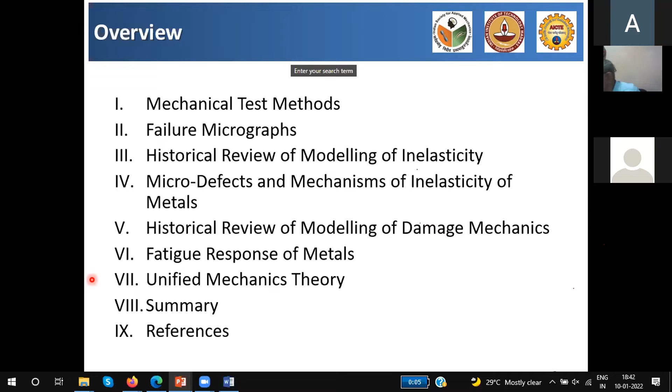These mechanical testing methods are very important, because the proof of the pudding is finally in the eating, and everything has to be calibrated and validated with reality. And that reality is with reference to what you see in tests.

And what are the tests that people do? People can try to pull things in tension or compression, or perhaps do some shear tests and so on, and get some graphs of various types under different conditions, under different loadings, loading rates, under cyclic loads and so on, and get some nice graphs, and perhaps try to capture those graphs using models.

So the entire business of modeling has to be validated only with experiments, and doing these experiments is not always easy. Therefore, it is good to know what experiments we can do, what experiments we cannot do, and how we can generate good experimental results even with limited test facilities that we may have in our own respective colleges. This is where I think a lot of collaboration is required, especially when you want to be close to reality.

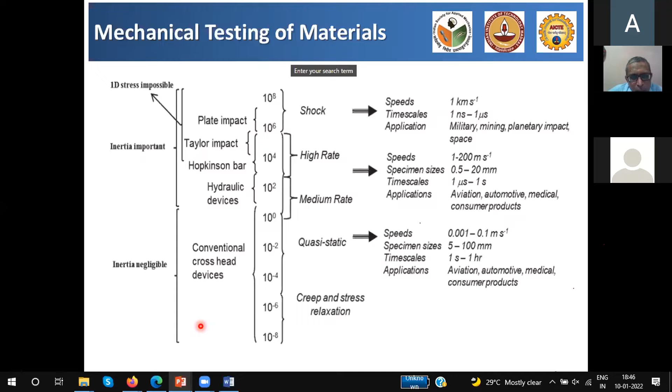In the recent time, there has been a lot of interest in rate dependent testing, or high strain rate dependent testing, and recently we also started doing some work on this high strain rate dependent response of materials. So we'll go into the type of tests that can be done to capture each one of them separately.

Now, what is it that is of interest to us is always a question. Do we really want to capture the entire load history? Yes, perhaps. And sometimes, are we interested in the modulus? Are we interested in the strength, ultimate strain? Is that enough? These are the questions that we need to keep asking ourselves each time that we do these tests.

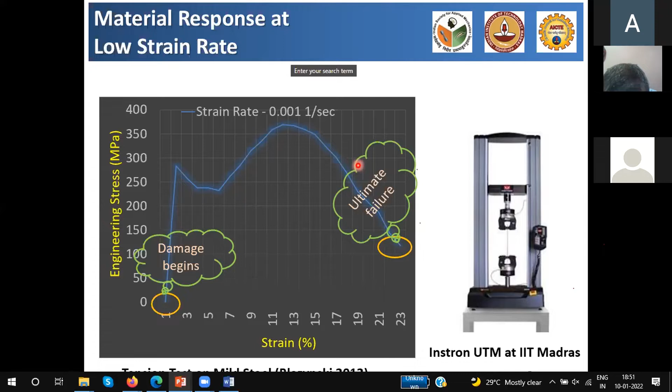So let us go into other types of tests that are possible and necessary whenever you are dealing with materials.

If you think your material is isotropic, you don't need to do any other tests beyond the one shown earlier. This is because an isotropic material has the same properties in all directions—not only elastic properties, but also failure properties—so you don't need to do tests in different directions.

This is very important to note, because all the models we develop during this course will be multidimensional in nature. They will talk of tensors and multi-axial states of loading. But just because you have a multi-axial state of loading, does that mean you require multi-axial testing? This distinction is not well understood by people, so it needs to be carefully understood.

In recent times, people have developed multi-axial testing apparatus, where you test a material both in tension and also in torsion. Professor Chellapandi, when he gives his lecture two days later, will talk about a special phenomenon that takes place especially when you are twisting your material in torsion in a cyclic fashion while keeping tension intact.

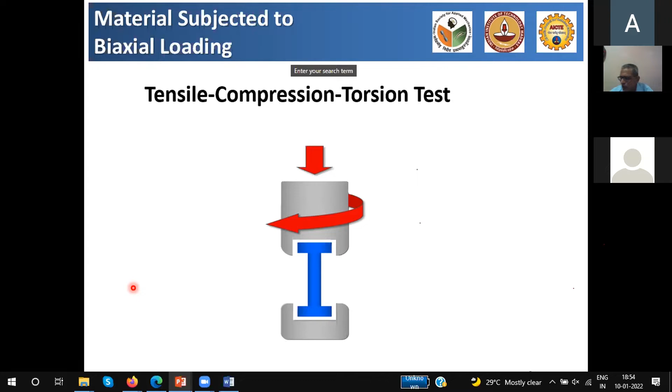Multi-axial tests have been developed in the recent past, of two different types. You can have tension or compression combined with torsion, dealing with a multi-axial state of loading, or you can have a biaxial testing apparatus, which involves testing in two in-plane axes.

At IIT Madras, we have apparatus that can do both: biaxial state of stress testing on thin polymers, as well as tension-torsion type tests on metals. I would say they are underutilized, and anyone interested in doing these tests is welcome to collaborate with us, or at least see how we can use these facilities more effectively.

But for most applications, you don't require these. Still, testing is important to know about. You require it whenever the material is anisotropic, because with an anisotropic material—both in elastic and plastic deformation—there is a need to do tests in different directions, or in combinations of two different directions.

That is an important thing to note, not only for metals, but also for other materials. Some special labs are working on these things, and it's not always required to do these tests. There's enough challenge even without this multi-axial testing that needs to be done.

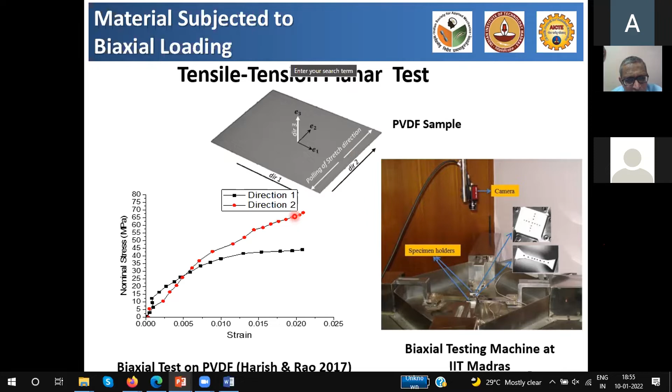Moving forward, there is also a need to do tests at high strain rates. In the recent past, especially over the past 10 to 15 years, there has been a great rush in trying to do these tests at high strain rates. About 10 years ago, building these facilities was prohibitively costly, so people working on high strain rates simply didn't do the test, or borrowed the material data available in a package like Adina, LS Dyna, or Abaqus, plugged in materials and values, and generated results.

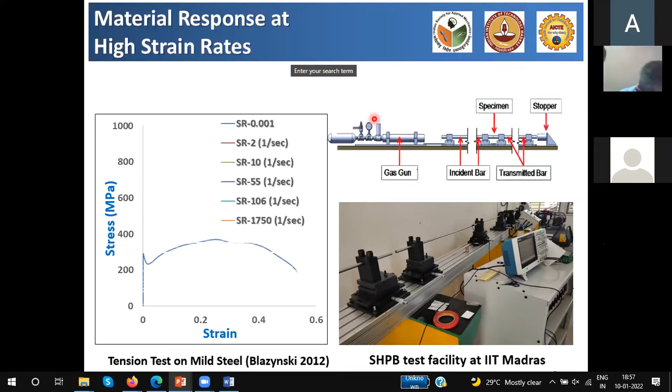Some of these results are shown in the next graph. These are important primarily because your yield stress can keep changing depending on the rate at which you load the specimen, as you can see in this figure. When you go from a quasi-static test to a very high strain rate test, on the order of 1750 per second, you find that the yield stress drastically changes, even though it falls off just as drastically after some time. The modulus more or less remains the same, even though the yield stress changes a lot. The only way to capture this is by doing an experiment, and this has been in the literature for quite some time, with people trying to capture this entire behavior through various models.

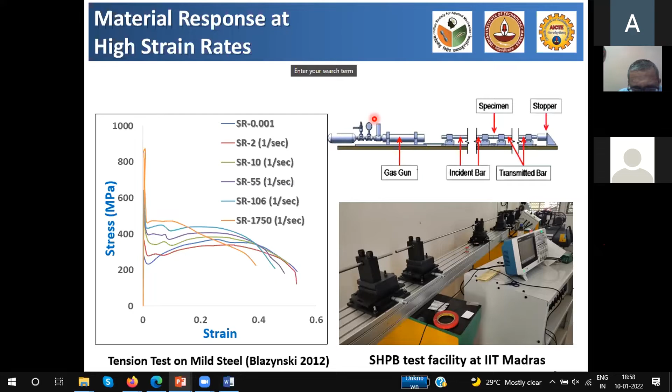Moving forward, you also have tests that need to be done for cyclic loading. In the olden times, people were simply monitoring the number of cycles to failure and developing something called a Wöhler curve, which served to find out how many cycles a material can withstand. When you have a combination of these cycles, people would combine what they defined as damage under various loadings and try to predict the life of a structure. Not all these predictions are astrological, but many of them are not really validated. If validated at all, it's over a limited range, yet they are still believed to be true even for the projections they are expected to make.

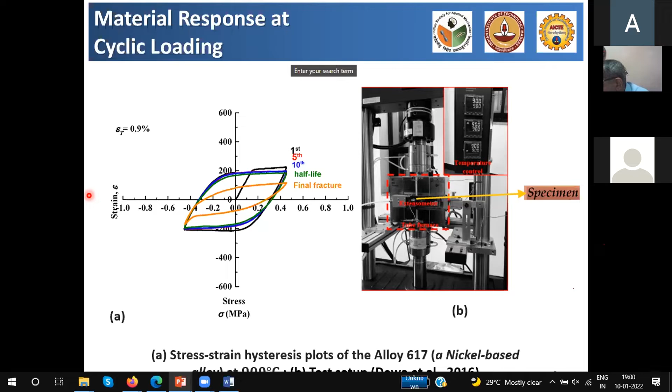Proceeding further, if you look at the stress-strain curves at different rates, some of you are working on high strain rates, you find there is a wide range of behavior that needs to be captured. If you take a material like copper, the initial modulus seems okay, but afterwards there is a lot of change in the nonlinear portion of the curve, which keeps changing with strain rates.

If you take a material like concrete, not only does the post-peak behavior change, but the initial modulus itself keeps changing, and you get different strengths depending upon the type of loading rate.

Similarly, when talking about a material like polyurea, the strains involved are quite large, of the order of 1.2, etc., and you find a wide range of post, quote-unquote, yield behavior in the polymer.

Terms like yield are actually relevant for metals, but they have been borrowed and used very loosely even for other materials. Therefore it's good to know what they really mean, what they originally meant, and what they should not be used for.

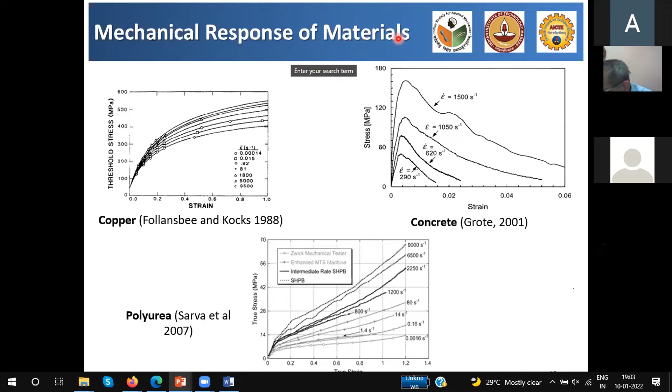Moving forward, now that we have looked into testing of these materials, in recent times merely testing a material is not accepted. People want to know what happens at the failure surface of the material, so people have been reporting failure micrographs.

This is something of an art that needs to be learned by all of us at different stages, depending upon the microscope with which you see different features of the same material.

Here you see two different zoom positions of a micrograph: one at 100 micron length, the other at 10 micron length, and you really see different textures showing up. The signatures seen at the 10 micron length scale are clearly different from those at the 100 micron length scale.

Therefore, there's a length-scale dependence in the observed features of a material. Consistent with what you want to capture at which length scale, your modeling strategy can also be different, and that's where a lot of research is going on, much of which will be developed in this course.

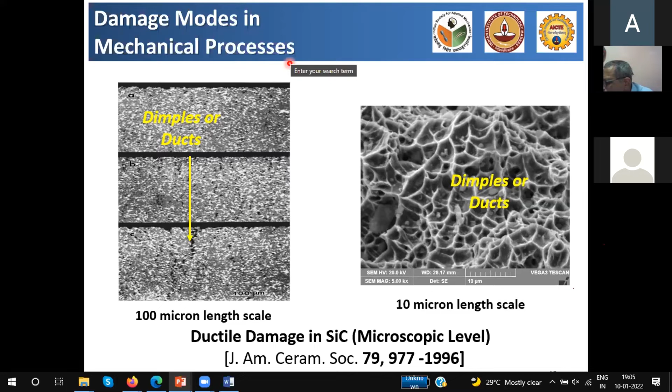Whenever a metallurgist sees this graph, he is able to identify it easily as a ductile fracture and treat it as a ductile material, which is distinctly different from what you see in the next graph, that of a cleavage fracture.

A brittle material undergoes a cleavage fracture, and many of you here are interested in fracture mechanics. It is not as structured as what you saw in the previous graph, and the signatures you see in a brittle fracture are definitely distinctly different from those in a ductile material.

So that is what you see in the left graph, and what you see on the right graph is basically a signature of fatigue failure. There is something called beach marks that are seen, because there is always cyclic loading, so it keeps building up, comes back with reverse plasticity, and builds up again, leaving beach marks in the micrograph, which is a signature of fatigue failure.

Fatigue failure means progressive failure due to cyclic loading, finally resulting in complete cleavage of the material. These are the things that prompt you to look at distinct cracks in a material. A lot of work has gone into analyzing cracks in materials, with the hope that analyzing a single crack will give better insight into the material.

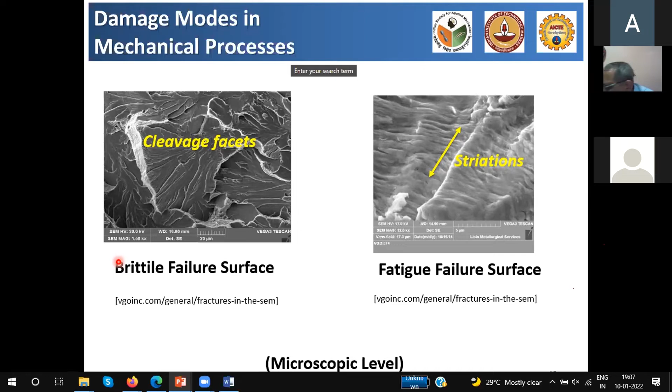Failure overall in an overall sense - part of it is true, part is not, because material is a conglomerate of many similar features. Just by capturing what happens in a single crack, it is unlikely you will be able to predict the total failure of a material. These are things we have to keep in mind when modeling materials.

Depending upon what length scale and what stage you're observing materials, there are certain things that are obvious, as you see in the top right hand corner micrograph. But what is leading to that particular failure is a postulate, and that postulate is also equally important.

People develop these postulates starting from stage one to stage two to stage three, as you see in the graph, where you start with some randomly located dislocations that slowly get oriented in a particular way. Then they form some elongated dislocation cell formations, subgrain formations, and then they all coalesce together and finally form a signature of some type. If you want to look deeper into this, that's all about that.

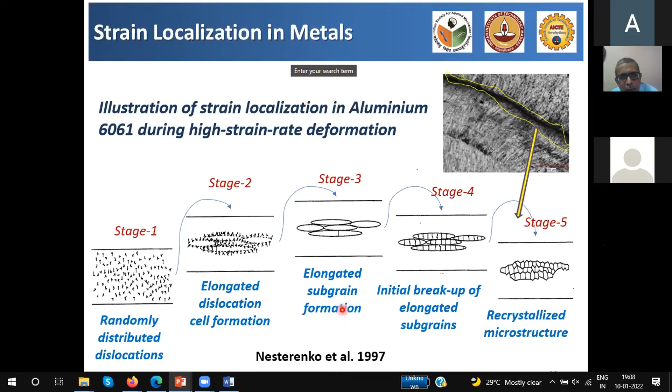So these are the micrographs that you see of various things that may take place within the material as you keep going, as you keep loading.

The attempt now in modeling is to be honest and say that the models you're capturing are true to the micrographs captured at the end of the failure of the material. Unfortunately, you cannot examine the insides of the material at various stages. You may know what is at the beginning of loading, and what is there after it has completely failed, but in between, what it is going through is not something you can always observe.

You can have a postulate - people have their own intuition of what is happening in the material, but many of these things cannot be visually looked into, and that's important to note whenever we talk of modeling. That's also the reason why there are different types of approaches, different postulates, and why things go in different directions when you talk of modeling of metals.

So let us quickly go through these issues - the term modeling. Now we are coming into modeling; we have looked into experiments, now we will look into modeling. There is something called a constitutive continuum model, used in continuum mechanics. When you take a course in continuum mechanics, they look at the constitutive model as something which bridges the gap between stresses and strains.

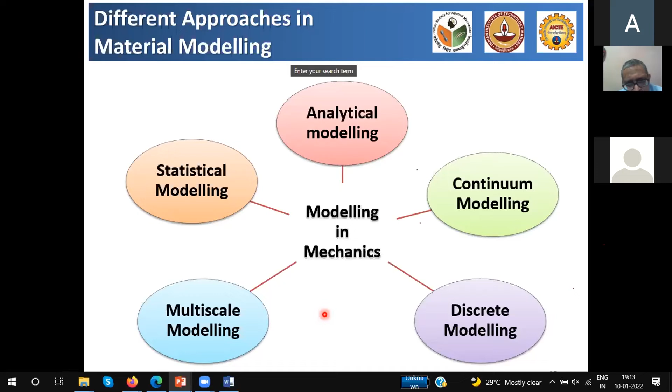Okay, so with this broad background, let us go deeper into the history of plasticity in general.

Professor, so what is actually involved in multi-scale modeling? Yeah, no, we have not come deeper into that. We'll first look at macro scale modeling, and come to multi-scale modeling later. Is there any comment you want to make? No, actually I want to understand that. Just curiosity, you want to understand what is multi-scale modeling?

Okay, fine, we'll take that up. Basically, in my own understanding, multi-scale modeling is looking at a material at different scales. Just as I've shown in the micrograph, where we have seen the same material, when you look at it from different scales, like 100 microns and 10 microns, you see different features. So to capture those features, you have to develop models at each scale, and to switch from one scale to another is what is broadly going on under what we call multi-scale modeling. We'll get deeper into it as we go along.

Right now, we are taking a very engineering standpoint of view. First, let us understand what is happening at a single scale, a macro scale, then go deeper into the micro scale. So let us go back to what we have learned in strength of materials in terms of the origins.

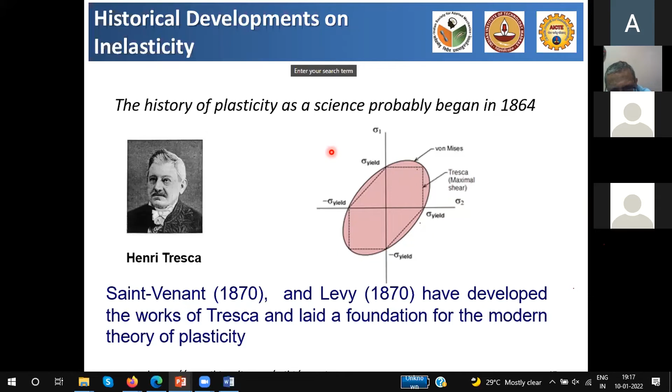Whereas much more is learnt about metals, what is known today as the failure criteria for metals, popularly used in all things, is something called von Mises criteria, which is based on distortional strain energy. When you try to plot it in the principal stress direction, in the stress plane, it will turn out to be an ellipse, which we'll see later.

So if you want to capture what Tresca tried to do, which I think was also developed by Saint Venant and others, you require a spring which captures the elastic deformation, meaning it can unload until you reach a critical point, and after that it starts slipping, just as a frictional block slips past a surface. So his earliest concept of plasticity is a spring-slider, friction-slider type of model, which seems to work well for such observations. That's where things started way back around 1864 and so on.

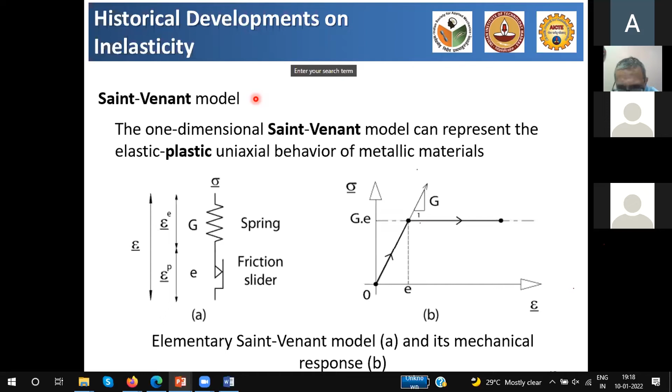So moving forward from that, then you have von Mises, who developed the concept of principal planes, or principal directions, or principal stresses, and started looking at things in a principal octahedral stress plane. The octahedral plane is something that is equiaxial with reference to the three principal axes. And when you look at the evolution of the material, please note that all of these are discussed in a multi-axial state of stress, even though the tests are done in uniaxial tests.

It is important to note that all models are multi-axial in nature, but most of the time they are validated with uniaxial tests. This is an important lesson that all of us should learn when we come to modeling.

When you test with equiaxial tension in all three directions, it is postulated that you will reach a yield which forms a circle when looked at in the octahedral plane, and that circle keeps expanding as you keep loading the material in the form of yielding. So that yield is captured as an expanding circle.

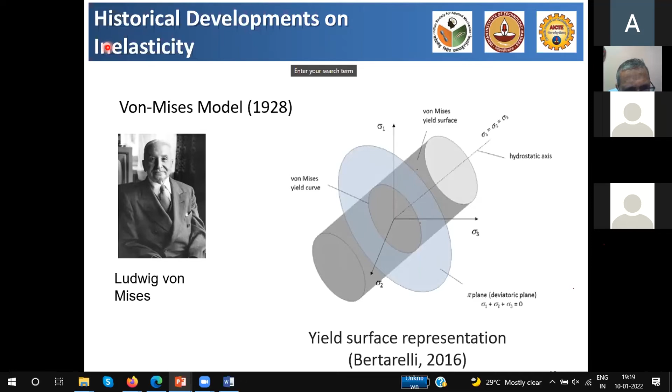This was postulated by von Mises. This figure is taken from a 2016 paper, but the concept is von Mises' own, way back in 1928. So we have jumped from 1864 to 1928 - that's more than 50, 60 years of development in plasticity.

Then there was the concept of bringing in the influence of mean stress in the evolution of the yield surface. Even though there were some developments by Prandtl in 1924, what is attributed to Drucker in 1949 and Prager way back in 1945 is the realization that mean hydrostatic stress plays a role in determining the yield surface. If you have a higher mean hydrostatic stress, you will have to do much more work to reach yield. This is a very important concept which is again being debated today in terms of the multi-axial role of hydrostatic stress and constraint effects in yield of material.

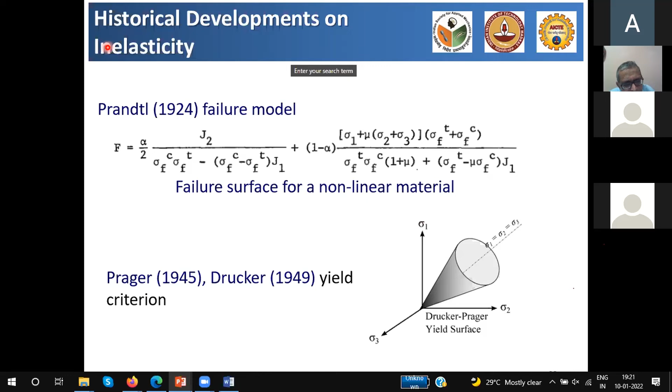So what is being debated here today was visualized and postulated in the form of a model way back in the 1940s. These are the developments - I will quickly pass through these things so that we have more discussions.

The way these yield surfaces evolve as you keep loading reflects how plasticity theory developed in various directions. All of them are slightly mathematical in nature, trying to postulate different forms of equations for yield surfaces - for example, the yield surface relating to deviatoric stress in three different planes, capturing these in the form of graphs.

None of them really give insight into why different things are happening, or what is happening inside the material responsible for this varied behavior in a particular metal. Therefore, translating it from one metal to another is not all that easy - you have to develop these things independently for each material. That's why these are called phenomenological models and looked down upon by many researchers working in the recent past.

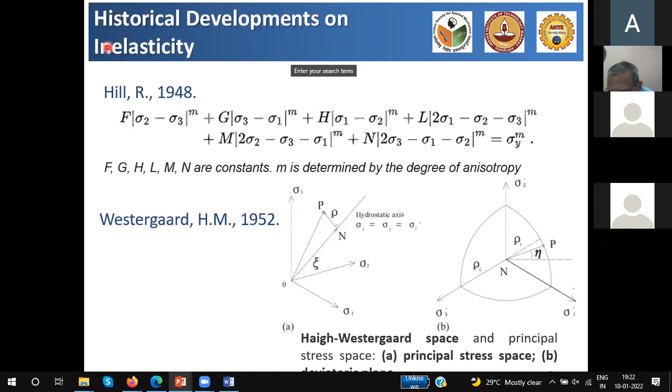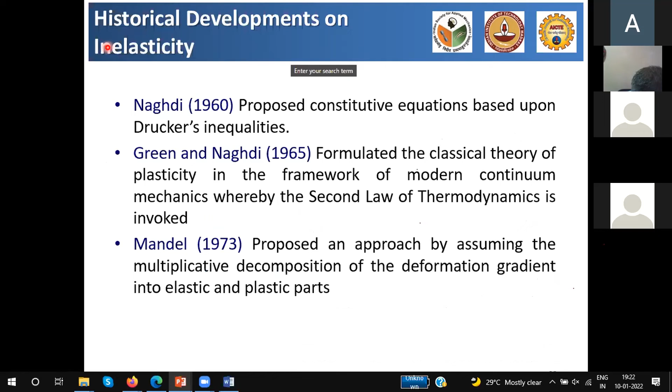So this is what we need to know about yield phenomena in metal. There are further developments by Green and Naghdi and so on, but we'll skip these and move to the next topic: micro defects and mechanisms in plasticity.

A lot has been talked about these defects and the role of voids. In metallurgy, one of the first things you are taught is that the cause of plasticity is the presence of dislocations - misplacements of atoms in a perfect solid. If atoms are totally missing with reference to each other, you get something called a vacancy, and the movement of these vacancies is responsible for phenomena like creep.

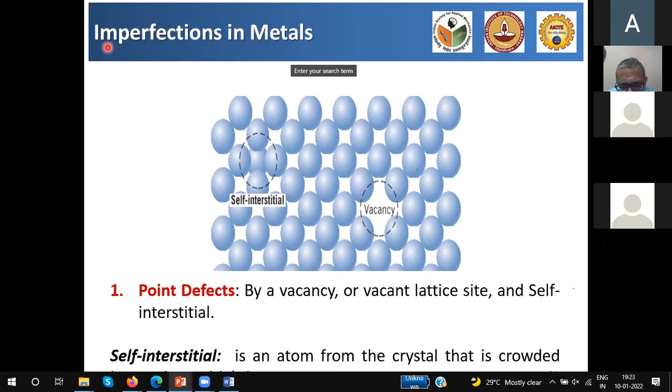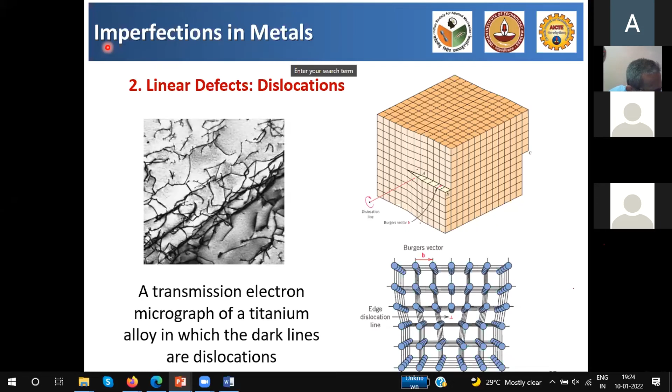These phenomena are discussed in solid state physics, and that's also talked about in metallurgy literature. Today it's possible to look at dislocations and get their signatures using a transmission electron microscope, recognizing dislocation signatures in the material. The movement of these dislocations forms the basis for various models developed from a micromechanical standpoint.

When you agglomerate all these dislocations, you get other signatures like twin boundaries - there are twin boundaries from twinning of materials, which is some sort of shearing, and then there is something happening at the grain boundaries.

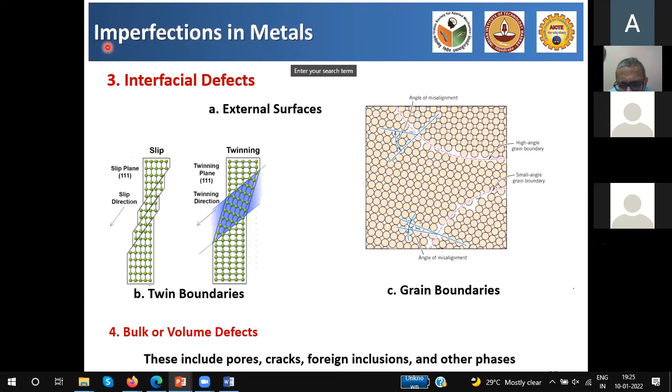Many of these things are postulated and sort of intuitively arrived at, based on what happens at the grain boundaries. You can postulate as to what is happening in various phenomena going on in a metal. These are intuitively postulated by material scientists, and now people in mechanics are trying to capture those effects and incorporate them into models of various metals.

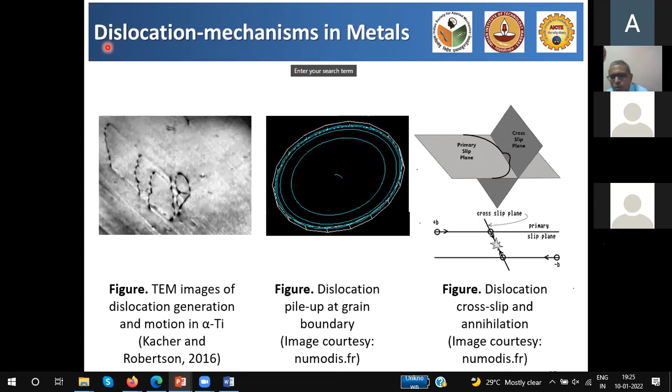Now there are various things going on. We won't go deeper into these at this stage. There are dislocations, like line dislocations, which keep moving and collapse with each other, form a small disk, and keep further moving. This is what is postulated - the animation you see is only a postulated mechanism, not something that is observed. What you actually observe is a single signature, as shown in the figure on the left side, and everything else is a nice animation to help you understand it better.

Okay, so let us move forward. I want to really have some discussions because I seem to have put too much material in here. But anyway, let us go through this.

There's an interesting thing about damage that people should know about in damage mechanics as we go along. Even as we were looking into various concepts of damage in the literature, we find that the term damage has been used ubiquitously by different people, meaning different things. Unless you really define precisely what you mean by damage, it's difficult to talk in the same language with different people, and that's a basis for development of various things.

For example, going back to traditional classification of materials, even by philosophers in Indian philosophy, there's a concept of dravya and guna. Dravya is the material, and guna is its properties. Either one can get disintegrated - the dravya itself, the material, can get disintegrated, lose what it's supposed to be initially, and all its properties can change. So unless you define which property you are changing, in what way, what is deteriorating, it's difficult to talk about these things in a single way.

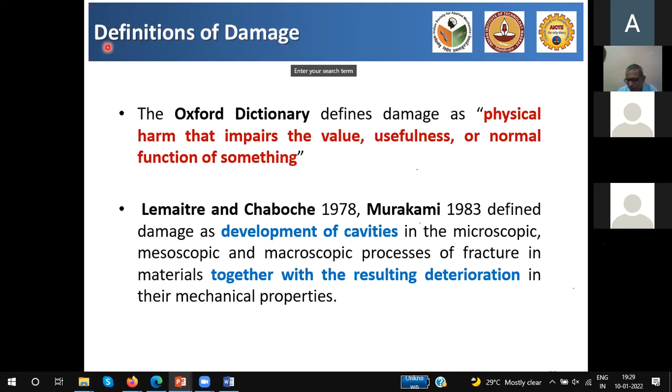And you have concepts from people with a chemical engineering standpoint, who also talk about damage more in the form of bonding between the various constituents of a material - so that's again a property that is changing. When you come to the thermodynamic definition of damage, they talk about loss of energy, loss of elastic energy, or loss of some energy resulting from various things done to it. Dissipation is defined as dissipation of energy, or energy in different forms, bringing in the concept of entropy, which keeps increasing with time.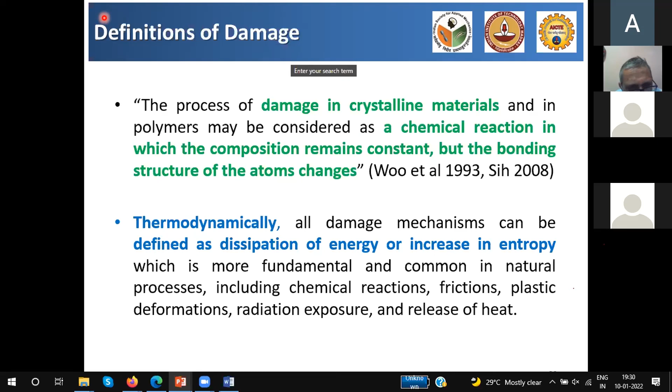So these are the different concepts of damage that you see in the literature at different times. Basically, what you see as damage mechanics was developed by somebody called Kachanov back in 1958, and he dealt with it as though it was a disintegration of dravya, which is the material.

And it develops as though there is a void, and the void keeps growing, and the number of voids keep coalescing with each other, and therefore it causes disintegration.

When material science people or designers talk of damage, they think that it is something that happens at the fag end of its life, in the form of cracks, micro cracks. All of the micro cracks come together and form macro cracks, and that causes deterioration. Anything that is closer to yield, they will not call it damage. It's a definition that they have by themselves. So whereas lack of properties or lack of elastic response takes place even at the stage of yield of a material, that is not defined as damage in the classical literature.

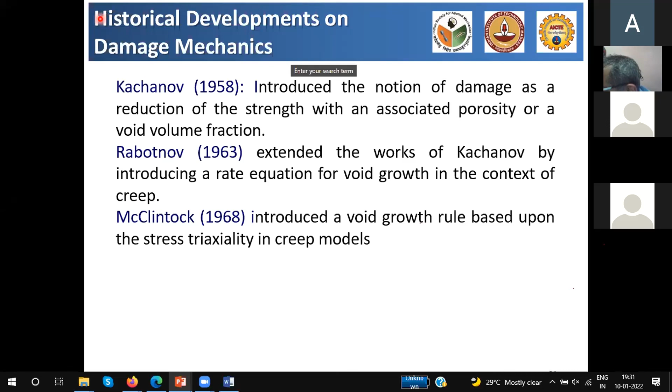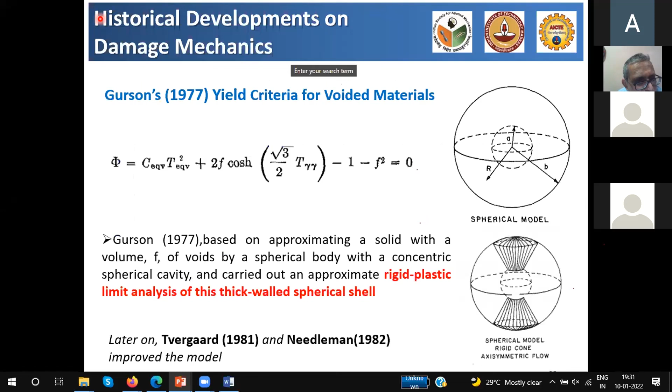Whereas from a different standpoint, in terms of lack of properties or lack of guna, it loses its ability to respond in a particular way, and that can still be defined as damage even at the stage of yield. So whenever we use the term damage, it is difficult. It's important to define it in the proper way and take it forward from that definition. That is what will be discussed at different levels as we go along in this course, and it's a very interesting debate we will enter into. So we'll skip many of these things, these different definitions that have come up.

Now this is interesting. We look at different types of models that have been developed. Johnson Cook has defined his own damage, so people start

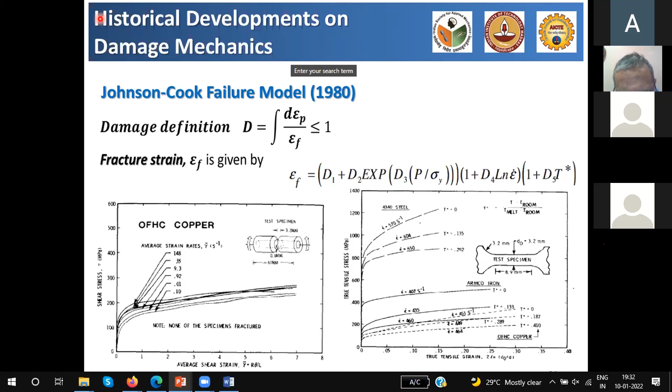using damage as an equivalence to some parameters. Wherever you have some parameters that are not fitting up the thing, then you call it a parameter, and when you don't find anything else, you call it a damage parameter. That's what Johnson Cook did when he looked at stress strain data of different materials and their failure curves, and he fitted them with curves and called each one a damage parameter. So don't get confused, they are just parameters. The damage is just a name. It may not mean anything, and this has to be very carefully understood.

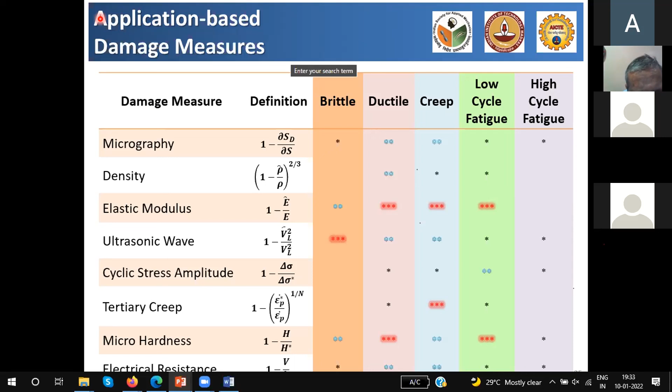So we put together this nice table which talks about places where you have a change in properties, whereas also a change in, for example, if you look at a change in density, it is more in the form of change in the matter or dravya. Whereas when you look at elastic modulus or ultrasonic wave velocities etc., all these things have been used in the definition of damage, and this is what you find in the literature. It's good to just see which term is used as damage in which context and keep track of it. When dealing with writing papers in that particular domain, it's good to go along with their definition, even though you may not agree with it from a different standpoint.

Okay, this fatigue is an important thing that we will be dealing with. I myself will be talking about it during the workshop. Again, the fatigue and Wöhler's curves have been used. They define damage as the number of cycles to failure divided by total number of cycles, and when you have a combination of this, you simply combine small n by capital N and they say everything together should be less than 1. We don't know from where they have picked up all this, but it may make sense from one standpoint of view, and that is accepted as absolute standard, and people produce PhD theses in defining this term called damage. As long as the community accepts it, that's fine, but if you ask deeper questions about it, it may mean nothing. This is something I have seen when I've looked at all these things on damage.

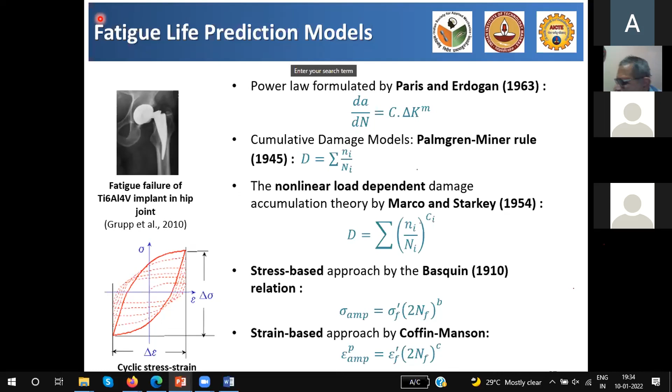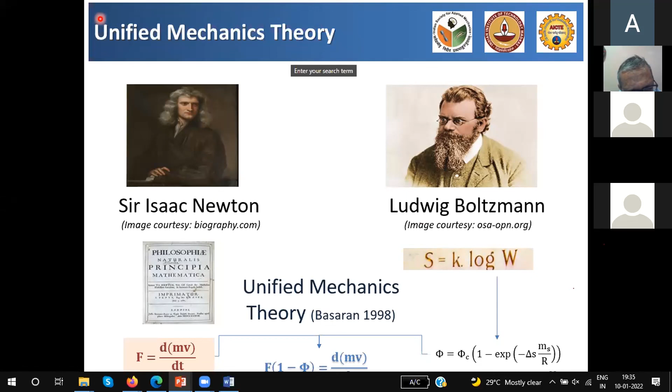So we'll come to close this lecture soon. We have something called unified mechanics theory. I'm not going to talk too much about it now because Professor Cemal will be talking about it. Basically, it is trying to combine the Newtonian approach to integrity of the material, where we define some properties, with the concept of entropy put together by Boltzmann. Combining these two, Professor Cemal says there's no material which is perfectly intact, and everything undergoes degradation right from the beginning, and it's important to put them all together when you are trying to assess the integrity of a material. More about all this you will hear later, and perhaps I will just stop here.